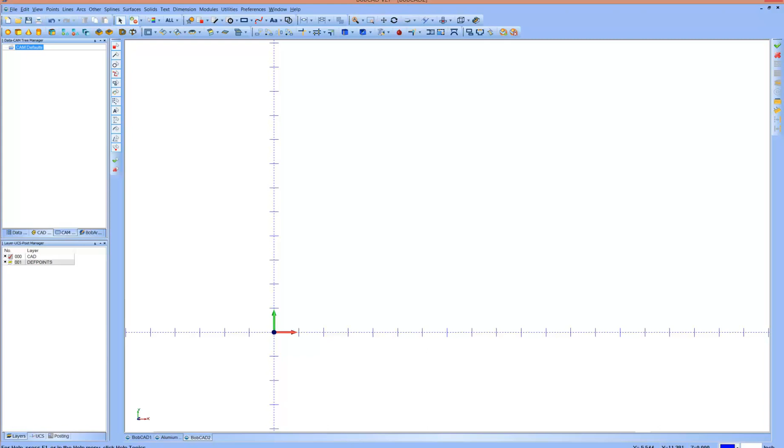First thing we want to do is hit File. We're going to do a merge since I already have a screen open. One of the things is I'm importing a DXF, so I go down here to File Type and click DXF. 7x7 rack is what we're going to include, and there it imports the DXF.

This is the center or 0 point on my reference, so everything's going to be from this place up. So when I bring my router bit down on my machine, this is where I'm going to start and put my wood. In this case, we're cutting plastic. We're going to put it up in this direction. So we got the file in there.

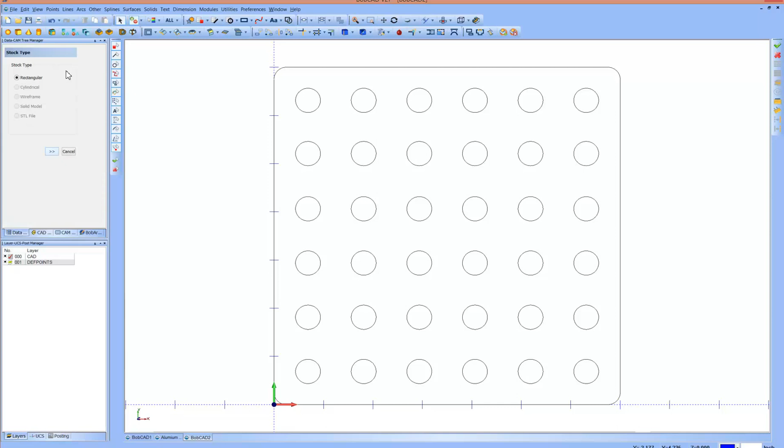We're going to come over to Cam, go up to CAM Defaults, right click, click New Job. First thing we're going to have to do is do a stock wizard. Now what I'm going through here is where the artwork is already finished, so it's already in here. We're going to continue to go through that. It will default and put that over top of your artwork. Just hit OK.

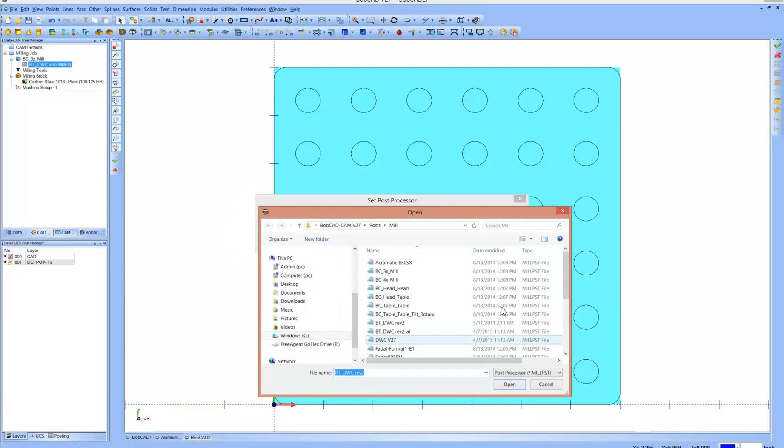From there, then we can come up and do our create features. I noticed my post processor there needs to be changed. I have a new post processor for V27, and it's called DWC V27. So if you don't have that, shoot me an email and I can email that post processor to you. The other one should work fine. It's just I've updated it. Hadn't done that in a while with BobCAD.

So once we've got the post processor set to what we want here, then we're going to right click on machine setup, and we're going to go down here. We're going to cut this part out, so we're going to use a mill 2 axis. We click on that. First thing that's going to pop up in our wizard is a select geometry. Now I will tell you, be very careful on selecting geometry. When we cut this part out, first thing we're going to do is cut out all these holes in the center, and then we're going to cut out on the outside. So I'm going to create a box around these holes.

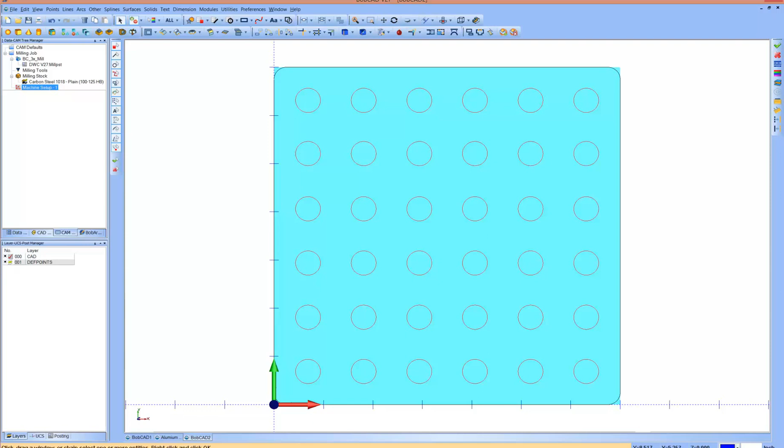You'll kind of see that they're red. All of them are red with my mouse off of it. Once I do that, I can either hit this check here or hit my space bar on my keyboard. Once they're selected, the wizard will pop back up. If that wizard does not pop back up, they did not get selected. So we'll go from there.

Then we hit next. And going through here, this is our rapid plane. This is how far the bit will come up above the workpiece between holes in this case. This is going to be the depth of our cut. In this case, it's going to be an 1/8 inch. So we can either put in decimal, or you can type in 1 divided by 8. You click that in there, and it will put the decimal in there for you.

As a general rule, because we're cutting this out, we'll have a sacrifice board under it. I like going just a little bit deeper. That way you cut completely through your piece of material. So I'm going to go about 30 thousandths, a 32nd deeper than what it really is. Then we're going to hit next. Top of feature is going to be 0, meaning that we're going to bring our bit down to the top of the material and 0 it out on top of the material.

This is a new thing they put in V27, but it's our strategy. Profile is what we're going to use today. As you pick on these different features, you'll see a little picture here showing you what they are. We're going to do profile. Now in this case, we're not going to have finish cuts on this, so we're going to come down here to this current operation, and we're going to delete the finish cut.

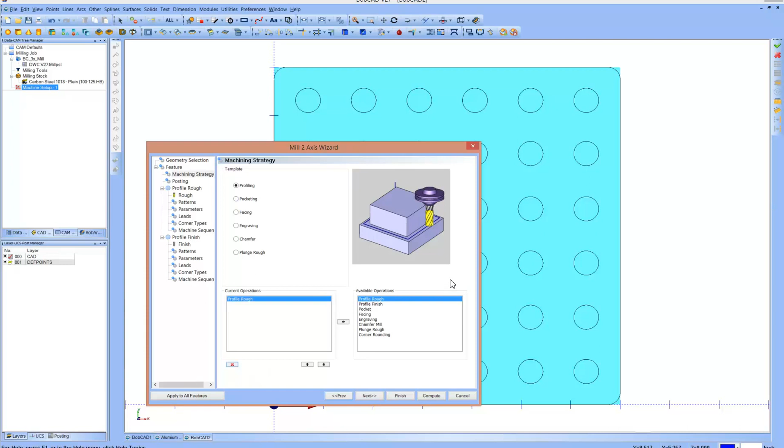Now if we wanted to bring other features in, we could and have multiple layers here. But for this, we're going to have one operation. It's going to simply come in, first cut out these holes. That's what we're creating now, and then we'll cut out the outside. So we're going to hit next.

Here's where we're going to select our bit. We can just simply type in. We're going to use a 1/4 inch bit. Now I know the decimal for that. It's not going to be a radius, and we can come down here to use the others. We don't generally worry about the length and stuff like that. Really, it's the diameter and if we're using a radius for a ball mill.

And then the two that we're worried about in this list of items here is my cutting feed rate. That's set at 10. I'm going to go up to, in this case, I think 20 should do it. It's only an 1/8 inch material. Plunge feed rate, I'm going to put at 15, which is going to make that a little bit slower. And then we'll go next. Now here, the compensation, the left and right, as we click on those, you notice how it goes on one side or the other or off.

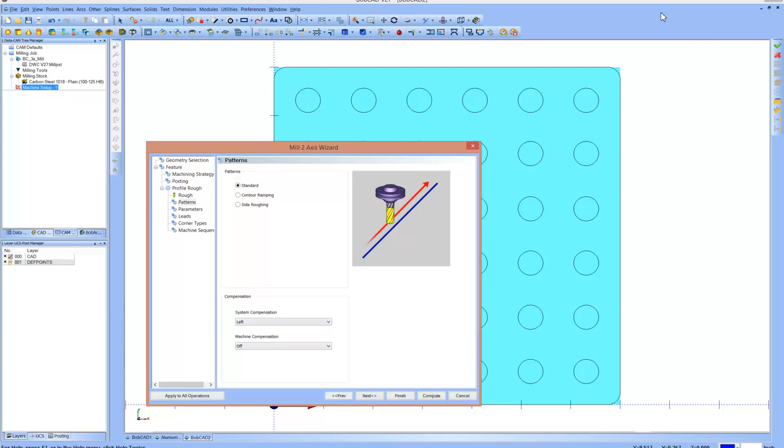Left or right, you just kind of guess on that, depending upon how it looks. We can certainly come back and change it, and I'll show you how to do that.

Side allowance, we don't want it to be anything. This is where we could make a side allowance, meaning it would cut out a hole and then come back and clean that hole up, which may not necessarily be a bad thing.

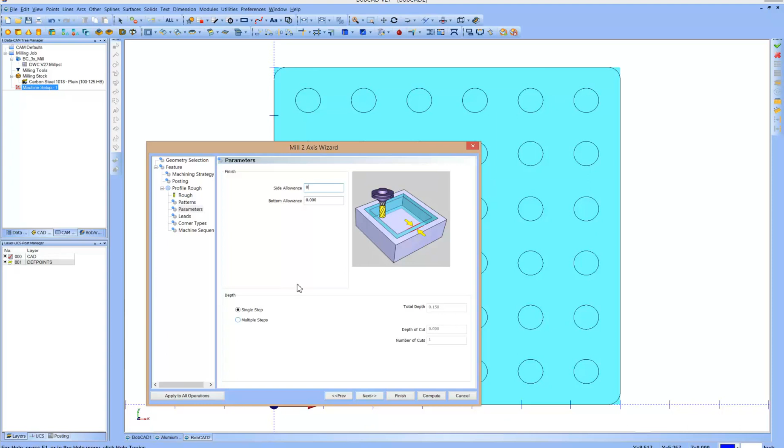In this case, our material is not thick enough to do multiple cuts. We're going to do a single step.

Leads, we're not going to change anything there, or corner types. You can click on the different things and see how they do it, but we don't need to.

No sorting, we want these to be the closest, however it figures it up. Certainly we can select on that. We don't mind doing a zigzag pattern either. Zigzag means it's going to go here and back and forth on that.

Okay, you notice how our next is grayed out. We're going to hit compute, or we could hit finish, but we're going to go ahead and hit compute. And you notice the little green lines are inside the circles, so that's where I would want it. For some reason, if that was on the outside...

If that was on the outside, we would simply come up to feature, right click and do an edit, then click on patterns and come over here, and I'm going to show you what it will do. We'll compute it, see how they're on the outside.

Now we've got to go back real quick and put it back on the left hand side because we want that to be on the inside. Now I'm going to rotate this just a hair, and we can rotate it by clicking on the rotate button, taking our mouse and rotating it.

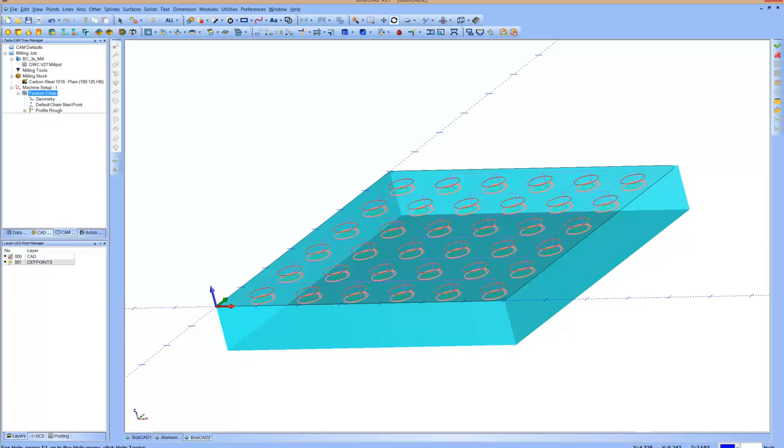See how it's got a little depth. See how those little circles are going to be down an 1/8 inch, actually a little more than 1/8 inch. We're going to click on this button to make it come back straight.

Our next, we're going to cut this part out. We're going to come up here. We can select right here. We're going to do an insert mill 2-axis and really do the same thing, but we're going to select on the outside. Now one of the things I'm going to do is I'm holding the shift key down as I'm selecting this outside line, and you notice how the whole outside perimeter changed to red.

That means I selected that. So instead of creating a box or selecting on all the segments of this, if you hold your shift key down, it will allow you to select the whole string. That will also show you whether a string is connected all the way around too. If it only goes around part way, then that means that line is not connected all the way around.

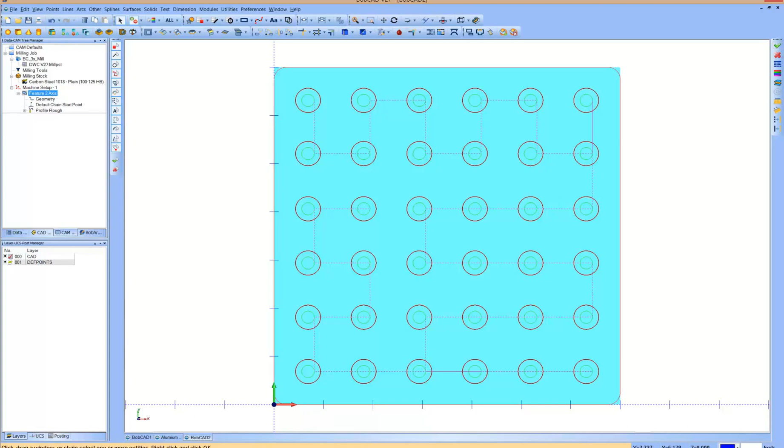Once again, either hitting this check up here for OK or my space bar. And then the wizard pops back up. We're going to go to next. Remember our depth, we end up going with 0.15.

Go to next. Remember we took off the finish, so we just have one process here. We'll go to next, not going to change anything on posting. Now you notice this looks like it defaulted to what we used the last time.

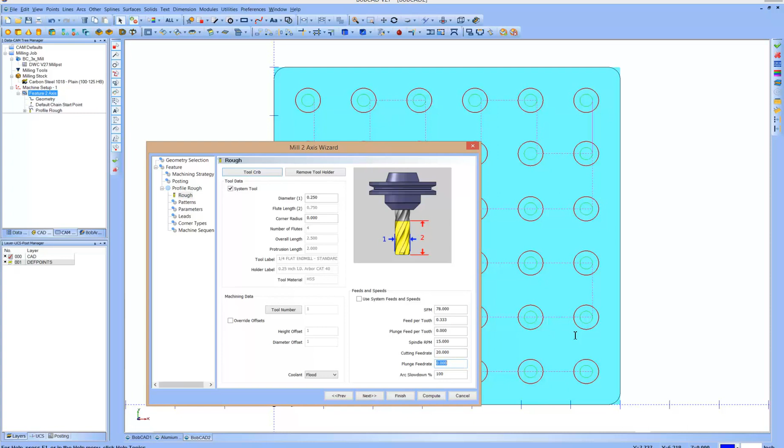So this time I don't have to change it, still 1/4 inch. Looks like my feed rate changed back, so we'll put those at 20, whoops, 20 and 15. We'll go to next.

This time, because we were left on the inside, good chance it's going to be right to go on the outside. Go back here and change the side allowance. Make sure that's 0, single step. Everything looks good there. Let's go to next.

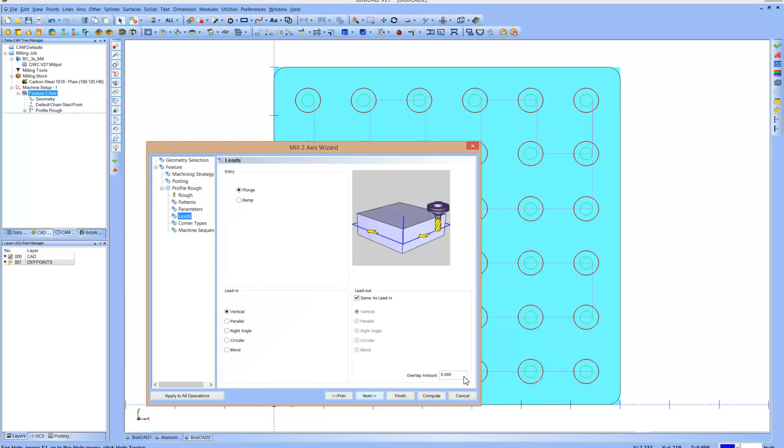Nothing on the leads, it's plunged straight down. Corner's not going to change. We don't need to because this is just going to be a one operation. But anyhow, let's hit compute. There we go.

The green line on the outside. So this is a finished product. You notice over here that the default start points, we could select those.

You know, I'm not even sure where I would want to select on this, but if we could go and modify that. Where's the little click modify? It looks like it's going to start here. If I wanted that to start there, I just click on it, hit my space bar, and that's where it would start and go around.

Click on different parts. Okay, so now we got the toolpath created. Now we are ready to go up and create the G-code. That's what the USB CNC is going to use.

So we come up here to milling jobs and we right click on it, and one of the things I would highly suggest doing right at this moment is come up and do a file, save as, or save our BobCad file. And in this case, I believe that was a 7x7. It's 0.125 thick. I kind of write my descriptions, 0.25 cutter, kind of write my descriptions of what it is on that.

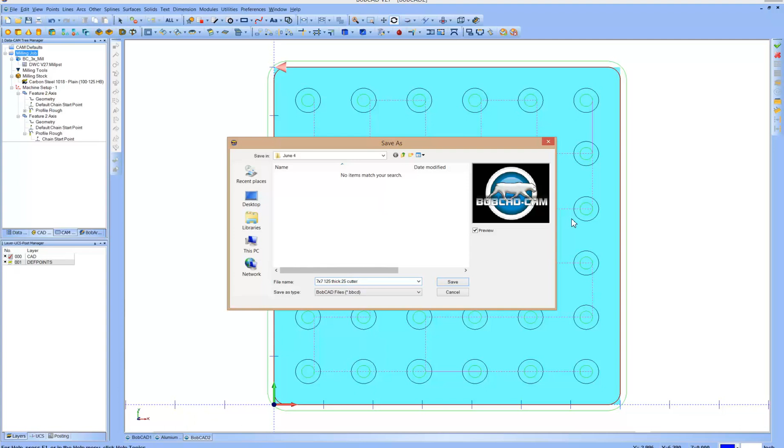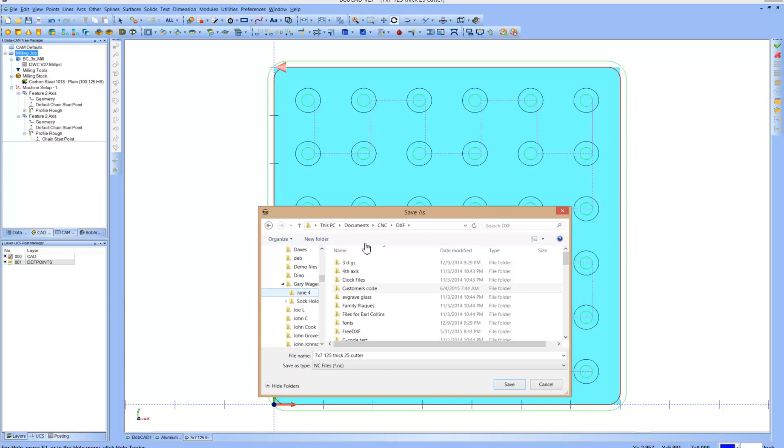I hit save. And then one of the things is if you save the file first, you come back up to milling jobs and you do a post and save as, it will save that name. And it's important that you select the right folder. In this case, I want this to go in the customer folder, a particular person's folder, and we hit save.

And it'll take a second for it to process, and you see over here it is created. That's the G-code. Now that file is ready to go into USB CNC.